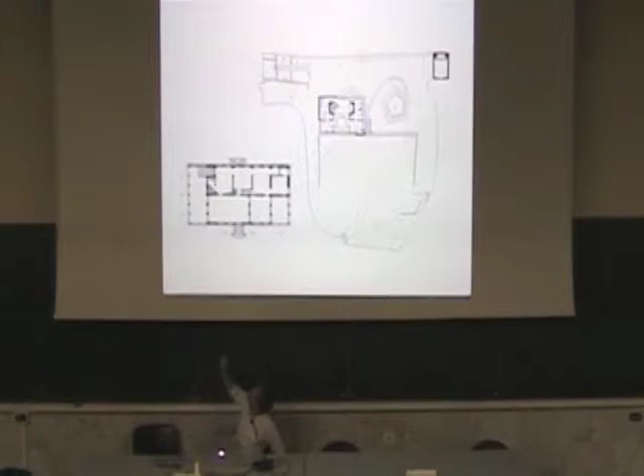And we chose the place you see there, which is somehow on the diagonal in between this huge villa and a little church in the corner of the garden. It was, let me say, a bit on the side, a bit to the back. It was along what was formerly a tennis field at the beginning of the past century.

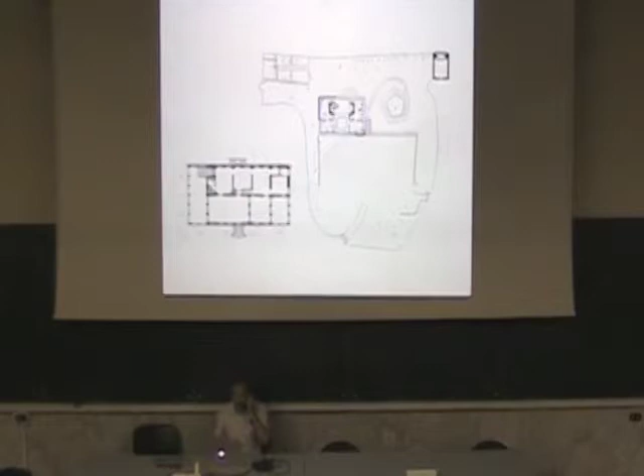And we went for, let's say, the sort of secret strategy, which is not so surprising in the sense that most of the square meters we placed underground along this existing wall over the tennis field.

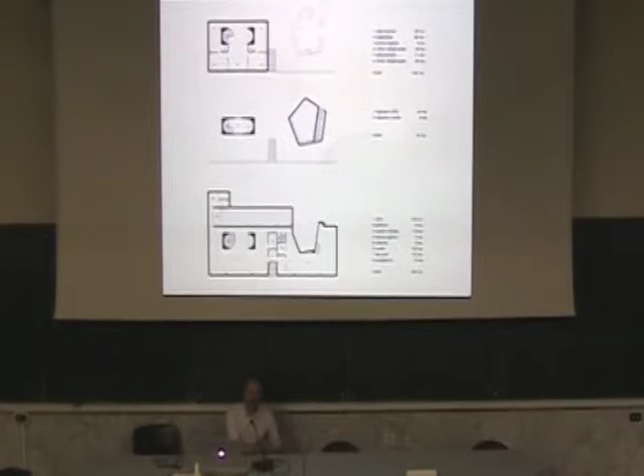There was a first floor, which you see in the middle, composed just by two objects: a huge pentagonal pot for a tree, including a little stairs to go down, and the base of this bigger volume on top of it, which was a sort of microscopical copy of the structure of the villa. So, we say, based on the same rules somehow. Then we started trying to give it a face.

That is what we achieved. I don't know if it's beautiful, but we thought of going for this mirroring facade for the base, and over it just adding these two heavy blackish volumes in exposed concrete, with this sort of baroque touch of the ribbon window, which is almost like the holes you got in a violin.

Parallelly, and you will see, I guess, on two projects of this sort, we even did a lot of research projects, trials on big scale, which was immediately part of our interest, to the extent that we were really exploiting every possible occasion in order to do this large-scale project.

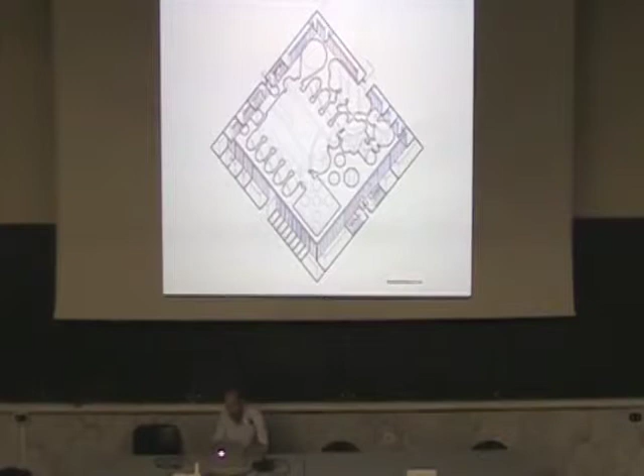So we just did one room with all the services around the main space, and then this bizarre ceiling that you can see here. Then, okay, it's an expo, so you've got to deal with the fact that the building must be temporary, so this ceiling was completely fake. It was a big supporting substructure in aluminium, supporting just a thin layer of pressed wood, feltwood - we say Joseph Beuys - which for us was even a tool in order to have a very silent room, so no noise inside, as in certain installations, which was sort of a relief after the chaotic experience of the Oriental metropolis.

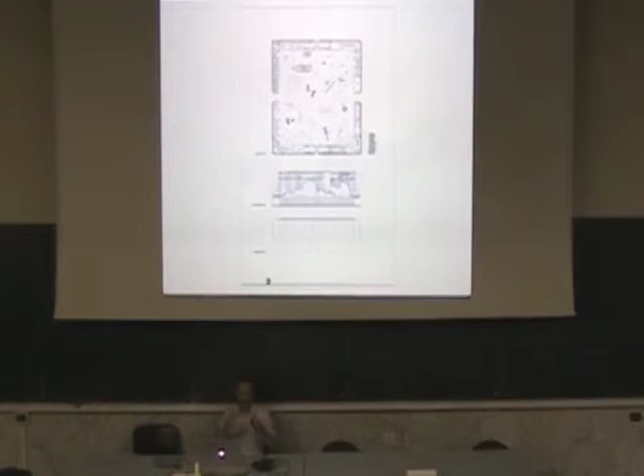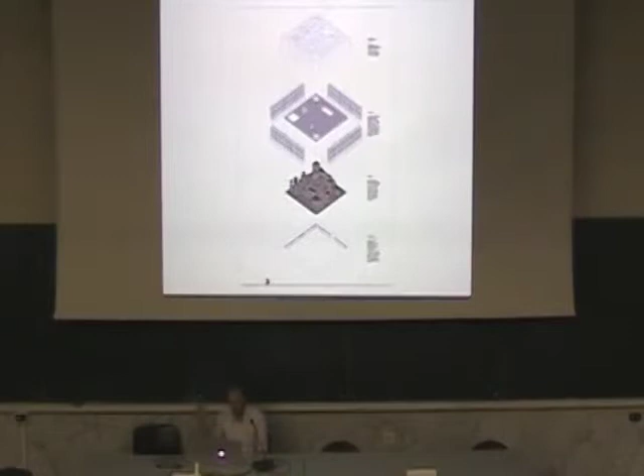The exterior was simply clad in this sort of soft plastic membrane, like almost a circus tent or an ice skate, something like that. Those were the elements of this project.

We faced a practical problem: the competition asked for a 60 second video. We didn't want to use 3D and computer graphics, so we started building this gigantic foam model, at a scale of about 1 to 20, only of the ceiling. It was foam, glue, aluminium, a lot of stuff.

The back of the model was amazing, I mean the unfinished part was amazing. My eyes, it was almost like a Schwitters piece or something like that. Here you see the two halves, the beautiful back.

We convinced the director of Palazzo Rosso, which by the way was very close to our office at the time, to let us use a room on Monday when the museum is closed. So we went there Sunday evening, five minutes before the museum closed, brought the model in, and on Monday we placed it at the right height over the pavement, a beautiful red pavement.

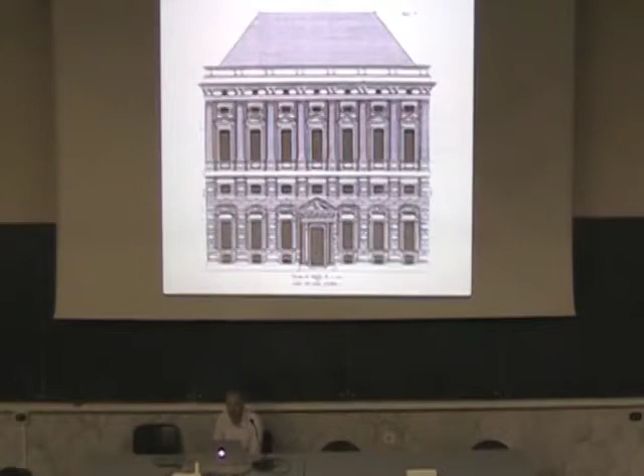The palace is this one, according to Rubens. This is the plan, the section, the palace after having built the extension in the back, the section somehow of the existing situation. They wanted to have a library there for their collection of books and documents.

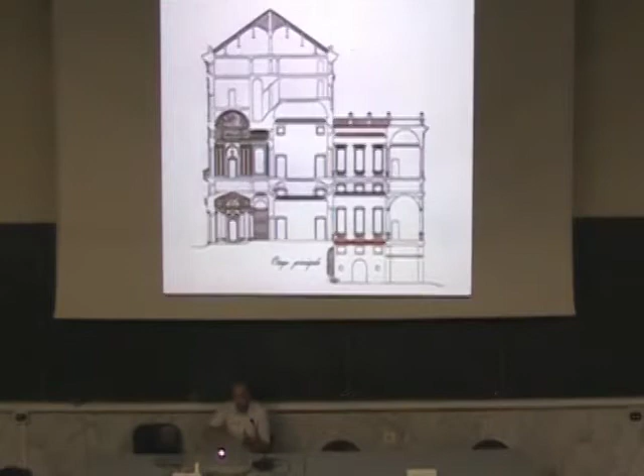What we proposed was relatively simple. In a way, we proposed to remove this slab, which is the red one there, which was built in the 50s, 60s, in order to raise the level of this covered courtyard in the back. And we organized this semi-public sequence of spaces from the entrance from Strada Nuova to this vertical space in the middle, and then the exit on a lower square in the back.

The red square you see there is the core of the intervention, this vertical space in which we say at least the public face of the library was condensed. The library was very simply conceived, so it was this public face, a simple room of books, very thin white metallic shelves. It was very low at the moment you enter the space from Strada Nuova, so like simply a handrail, a parapet. But from below it was quite tall, with certain openings and mechanisms around.

We won the competition. It will never be built because they don't want it, basically they don't want to try to build it. They don't care. Obviously we understood that they don't care after winning the competition.

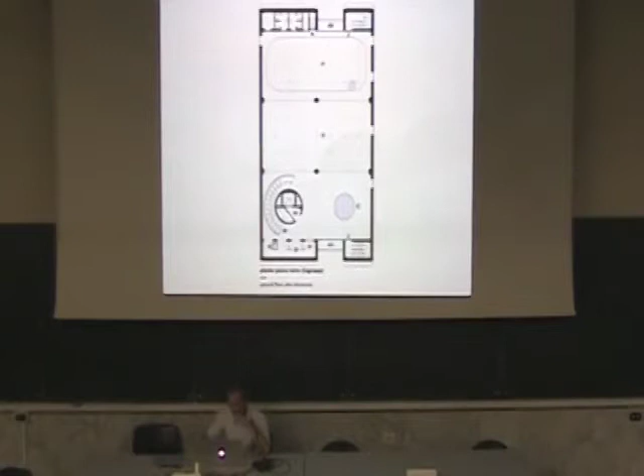All the plans of all the levels, uses, maybe that include materials which jury members might like. Program, plan of the ground floor, so a proper public floor.

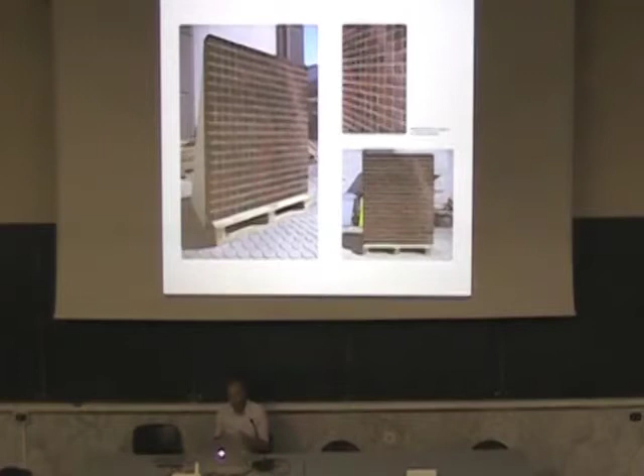First trials of the facade, so a proper mock-up, is an idea of building a mosaic which from very close is just colors, you know, six different colors of these bricks, but from afar, from 10, 12, 15 meters, might start to tell a story.

We are now building. These are just some photos, some pictures from the site.

Inside space, exposed archive. These are the levels of the office, the stairs, and the lowest part of this facade. In the lowest part we got half a brick, in the highest part we will have a quarter of a brick. Here it's simply patterns, and the technique we developed is very primitive. We print these numbers related to the six colors, glue these papers one-to-one on the foam of the insulation, and then they put the bricks one by one. So this is the first built pattern.

Again, Stefano Graziani, Duomo Square. A recent project last year with Kuehn Malvezzi and Yellow Office, landscape office: the Great Mosque for Pristina, Kosovo. The Muslim community wants to build a monument for a sort of attempt at a national identity, at least a part of it.

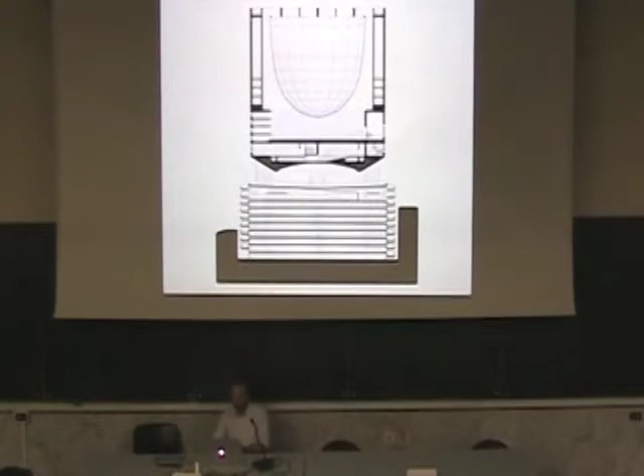So we said, okay, this object might work in terms of action, in terms of monumentality. Here you see the plans: the circular organization of the parking levels, the square, which in our case was in between the parking and the mosque, the shopping area, which was just below the square, and then the hexagon, in the belly of the body of the mosque.

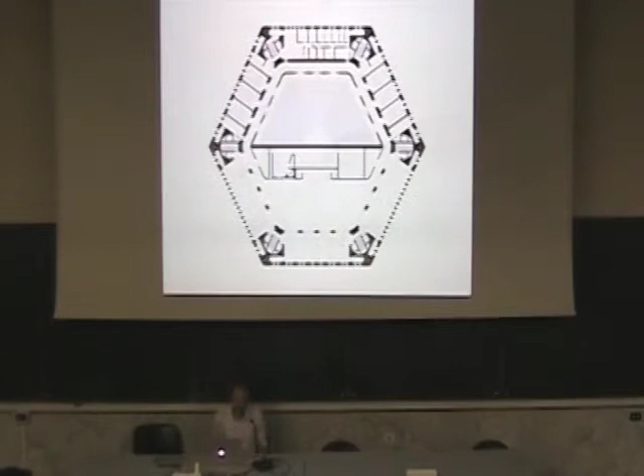Just under the pavement of the mosque, we placed the house of the Imam and the learning conference center. The mosque itself is the main area, with the lower ground, women's area, elevations, golden mosaic on the upper part of the cylinder, because we thought it's better not to put a minaret, since that's too easy in a way, and we thought this mosaic was already telling us about the religious, or at least creative, essence of the architectural object. Same strategy for the vault over the square, the space in between, which was the way of looking at the city 360 degrees.

Attempts at making nice renders. The vault again, space in between. The main hall with this gigantic lamp, a sort of inverted dome modeled on the roof of the conference hall of the Communist Party headquarters by Niemeyer in Paris, with these aluminum lamellas. Maybe the only moment this object is nice toward the city is during night, with a bit of neon lights. They didn't like it. The competition was won by a really 16th-century-alike Ottoman project, and having seen the pictures of the jury members, I understand why.

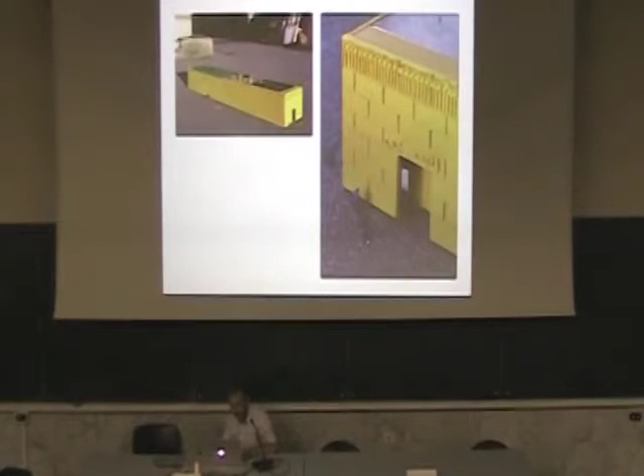Plans, section - it was supposed to be built with blocks of yellow concrete. This is the model we did for visualizing with Graziani, with not so much time to take decent pictures, but still trying. We lost. They won with a beautiful project, I have to say, and in retrospect, I really think we didn't want to win, because Bahrain is trying to show a democratic face, and we proposed them a huge wall, 12 meters high, just really saying 'I'm a dictatorship, I've got power, fuck you' - so we lost.

And yeah, this project is much more up to the situations, to their desire of being light, more modern, and so forth.

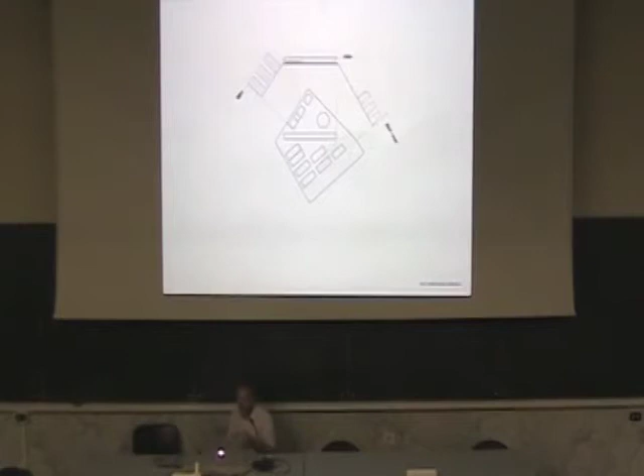Axo of the first phase, sections, model of the first phase, qualities of the different apartments—the slab with sun towards south, forest in the back, the architecture of the slab, details. Second phase, we built a big model in order to get decent images.

In retrospect, maybe it was designed to try to achieve a certain Swiss monotonous tone. That's what we did. We entered the second phase, in which, by the way, Nicola Barbieri was involved, but we lost. Nicola didn't win.

More images, again by Stefano Graziani, taking pictures—let me simply show you. This was the part of the park, between the towers and the long slab, with this circular Brazilian school in the middle, along the Arve. This was the square public space, very fragmented somehow, along the long slab, between the long slab and the Manhattan, which we have seen years ago.

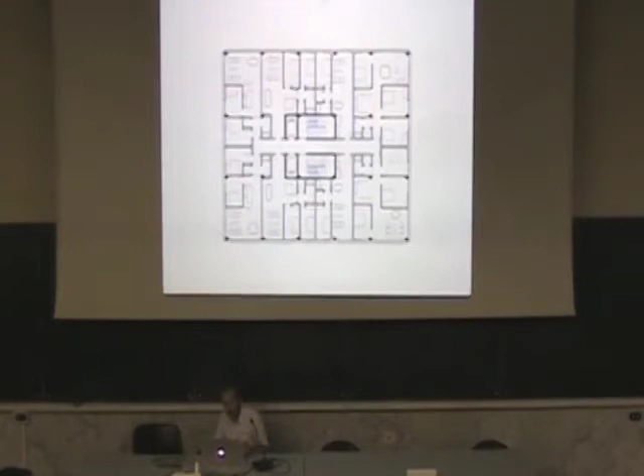Again, on the other side, conditions of the towers typology, the model in the room, Manhattan again, towards the end, beautiful landscape by Yellow Office.

We got one thing, which is this amazing courtyard, which at the moment is very ill-defined, but it's very big, like 200 meters by 40 meters. In a way, we sold them the story that this courtyard was really an amazing asset for them, and we sold it using Bramante's Belvedere.

In the project, with the limited amount of tools at our disposal, we simply tried to make a courtyard out of nothing, in the sense that the courtyard is not completely surrounded by buildings. As far as you go deep into the plot, far from the street, the courtyard basically disappears.